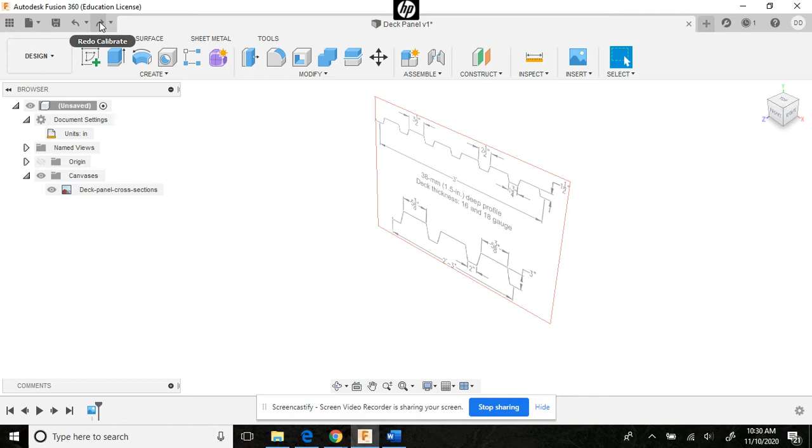In today's design, we're going to be importing the canvas for a deck panel and get that calibrated up. I chose the 2-foot 3-inch dimension to calibrate my deck panel. And then I started working off of these known dimensions here.

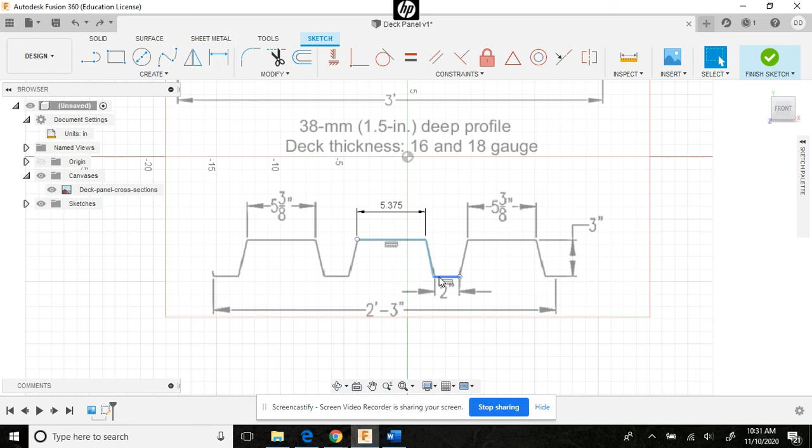Typed in an exactly 2-inch line right there. And then I used the offset to offset exactly 3 inches above that because I'm trying to adhere to all the given dimensions. Once again, I was able to use that 3-inch offset to continue a line out 5 3/8 of an inch. No longer needed that temporary line after I connected to my 2-inch line here.

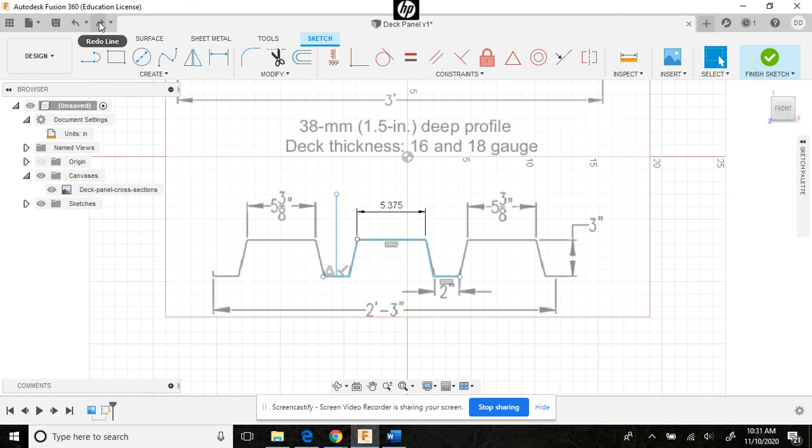And again, in this particular project, I'm going to be creating a lot of temporary mirror lines in order to transpose, copy exact mirror images. There's a temporary mirror line that I used right there. I made another temporary mirror line to complete out to the edge of the panel. And that last little lip right there.

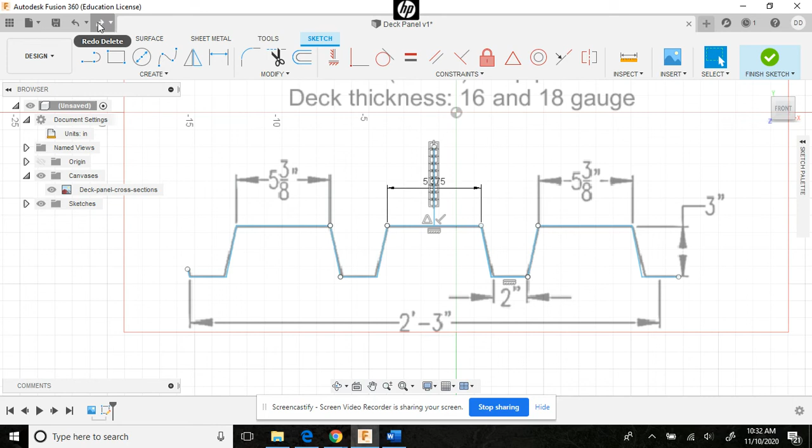Finally, I'm in a position where I can mirror again off of a temporary line and complete the remainder of my original panel, which is going to represent the bottom side. Now I'm going to zoom in just a little bit and show you how I use the offset command.

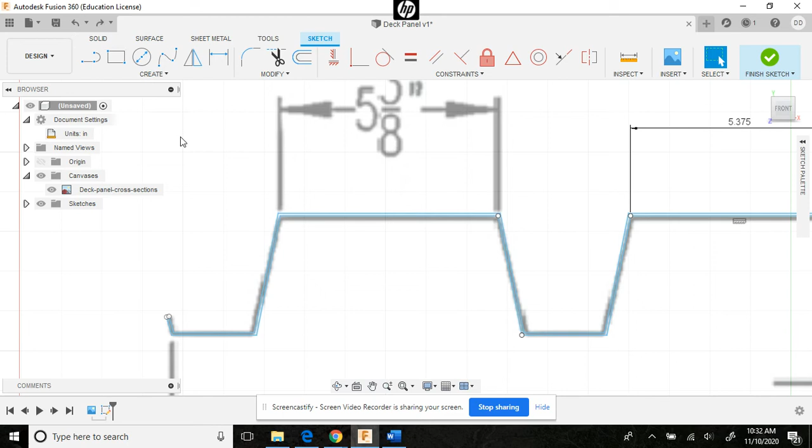Because we are talking about a 16 gauge, that's basically 1/16 of an inch. I'm offsetting to make sure that I can place a correct gauge. And then on each end, after I've completed that offset, there's a little gap in the panel, that 16 gauge gap or 1/16 of an inch gap that I had to connect there and on the opposite side.

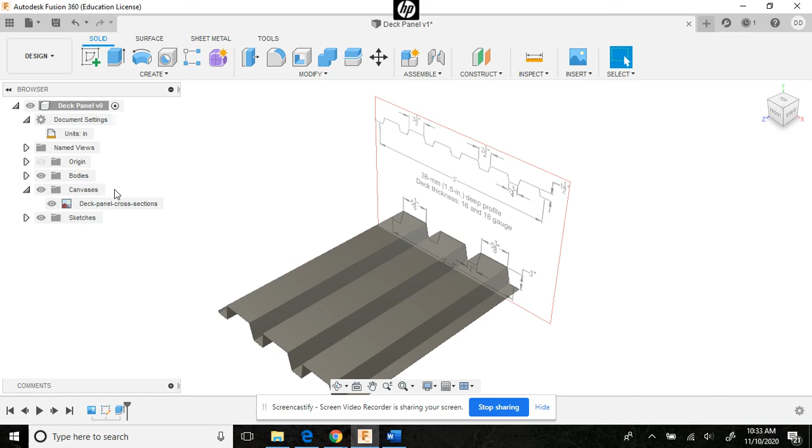So once I connected that correctly, I was able to go ahead and extrude because I have a closed path that I could extrude. In this case, I extruded 36 inches. And I no longer need my canvas, so I can toggle the visibility on that and save my work for the deck panel.

At this point in time, you should have accumulated quite a few different types of parts in your new project folder. And make sure you always upload a shared public link to the hub for a grade.